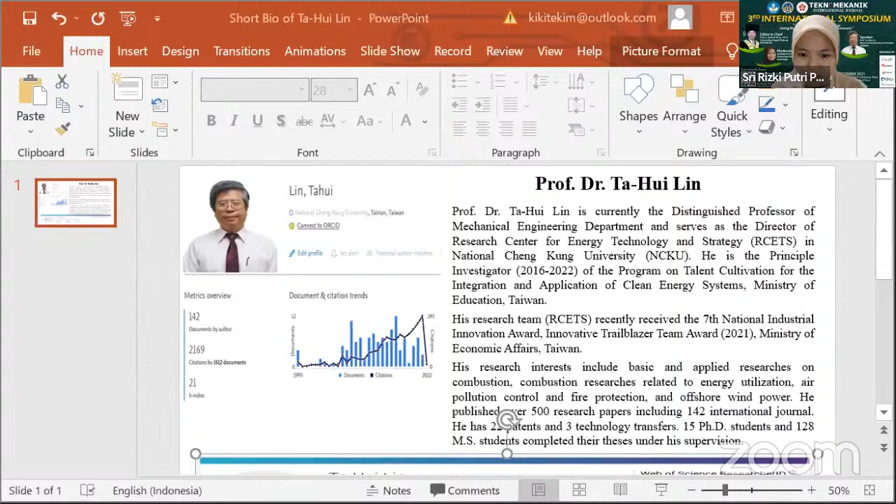The CV of the professor can be seen on my screen. His research team recently received the 7th National Industrial Innovation Award, Innovative Trailblazer Team Award 2021, from the Ministry of Economic Affairs, Taiwan. His research interests include basic and applied research on combustion related to energy utilization, air pollution control, and fire protection, and offshore wind power.

He has published over 500 research papers, including 142 international journal papers indexed in Scopus. He has 22 patents and 3 technology transfers. 15 PhD students and 128 master's students completed their thesis under his supervision.

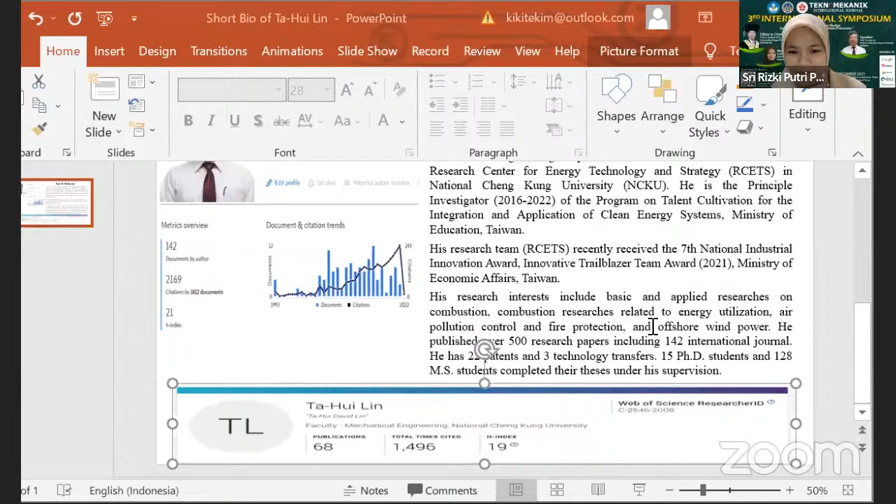Thank you. Let me share my screen. Can you see the slides? Yes, clearly, Professor. Okay, thank you so much.

It is my privilege to have this very nice opportunity to communicate with all of you and present our recent results on biomass studies. Before my talk, I would like to thank Professor Sherry, Editor-in-Chief, for this symposium and journal, and for giving me this opportunity to share our research findings with you. I also thank Kiki for all the arrangement for this presentation.

Now I start to deliver the talk using these slides. My title is Utilization of Sewage Sludge using Multiple Thermal Conversion Processes. Those experimental observations were actually performed by my student, Ernest Forges, and my two colleagues, Dr. Cheng and Dr. Fangxuan Wu. Those results are coming from our research center.

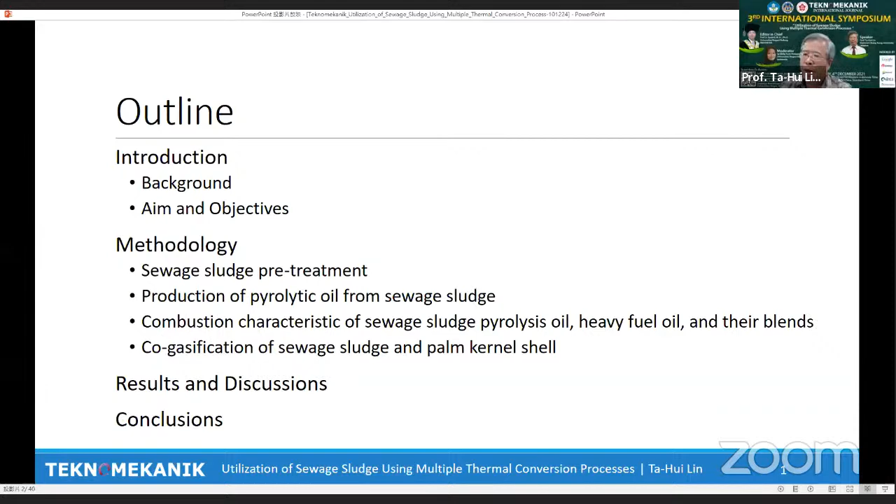In this talk, we will cover, initially, some introduction on the background and objective of this research. We will introduce some methodology for the pretreatment of the sludge, and try to give some understanding on how to produce pyrolytic oil from the sewage sludge. We will check the combustion characteristics of the blended fuel of sewage sludge, pyrolysis oil, and heavy fuel oil. Finally, we will have some introduction on co-gasification from our experimental results. Then there will be results and discussion presented, and finally I will give you the conclusion.

In the introduction section, recently, all over the world, people talk about carbon reduction, especially with the main target for 2050, where people try to eliminate carbon emissions down to 10 gigatons compared with the current 32 gigatons of CO2 carbon dioxide emissions. This is a big target for us. So how do we reduce carbon emissions?

Actually, the utilization of renewable energy will be the big task. People think about the two major renewable energies, wind energy and PV, which will be the most important two renewable energies to achieve carbon dioxide emission reductions. But in the second position, we need to think about bio-waste utilization.

Since bio-waste utilization is spread all over the world in different kinds of situations, here I try to give you an understanding of where we can find bio-waste.

For example, from the forest and wood processing, agriculture, agro-industry, and even in the city, we have so many different kinds of waste and animal waste, and also from food processing and the paper industry. Those different resources will provide different kinds of biomass.

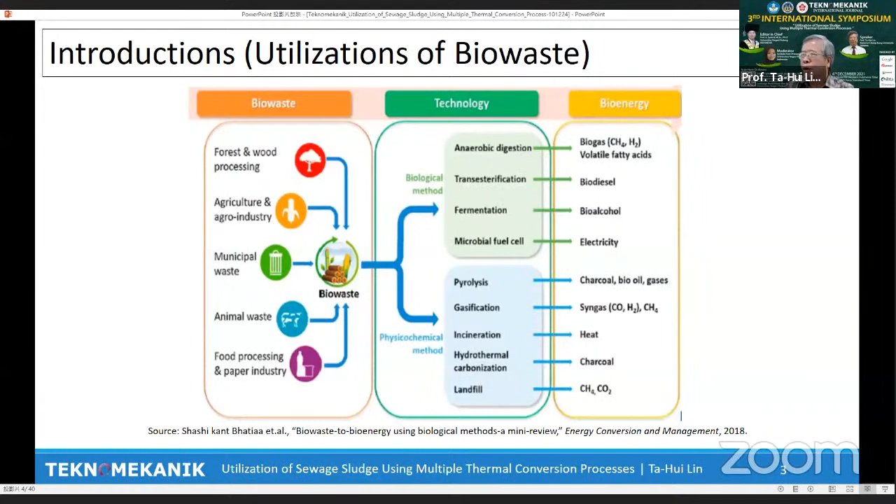This is an overall picture to tell you where you can get bio waste, and how we can convert bio waste to bioenergy through different kinds of technology.

Now we try to focus on the target of our study, so-called sewage sludge. Sewage sludge is usually produced from the water treatment department in different kinds of companies. There is a summary on sludge production for different countries.

You can see from these figures, let's look at the production per year. There is a large amount of sludge production by China and the USA, because they are big countries and have a large population. They have large productions for sewage sludge, reaching 6 million tons per year.

I think Indonesia still has a certain amount, maybe a big amount, of sewage sludge production, but in the literature we cannot find this data. Maybe you can check it. I think there is potential to think about how to use sewage sludge to produce energy.

But in different countries, they try to deal with sewage sludge or other bio waste by different methods. In this plot, you can see they may go through agricultural use, or incineration, or compost, or landfill. Now I'll give you some understanding of different kinds of application.

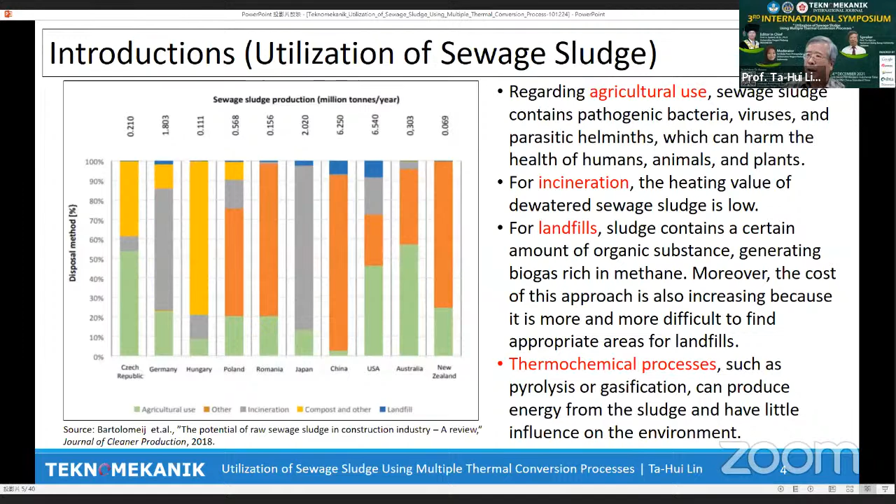Now, based on the physical chemical processes, we look at biomass in thermochemical conversion. There are 2 parameters you need to consider: temperature is one of the controlling parameters, and the other is oxygen supply. Based on the temperature range and oxygen supply, you can get different products, as shown on the left vertical axis. Let's discuss this.

The first case is if you supply enough oxygen and let it go through the combustion process, we call this thermochemical combustion. In this process, the temperature is pretty high, from 900 to 1500 degrees Celsius, and you convert your energy to heat, releasing heat directly. This is the so-called combustion process.

The second case is you reduce the oxygen supply. That means you do not want complete combustion for your gas or sludge, but you try to make it into a gas. The product will be syngas. In this process, the temperature range is between 600 and 1300 degrees.

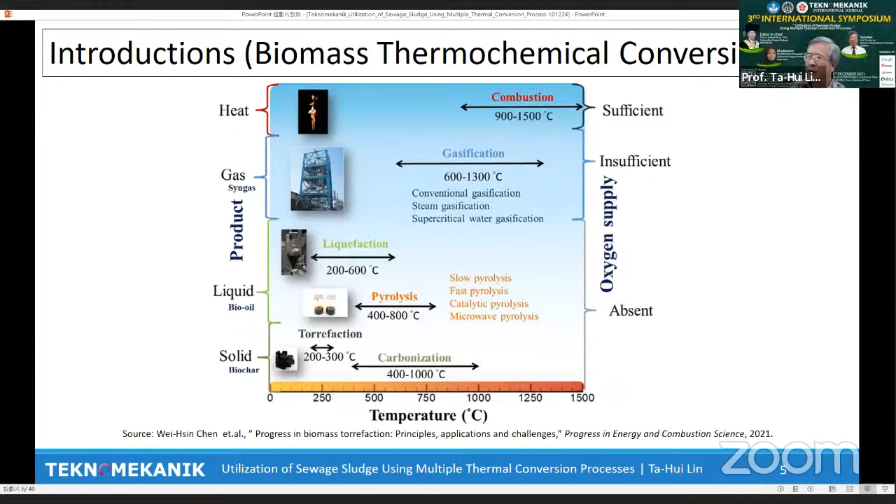Finally, the last one is the solid biochar. In this situation, you do not supply too much energy. The process is controlled at a lower temperature, in the range of 200 to 300 degrees. We call this torrefaction. If you increase the temperature higher, we call this carbonization. For the solid biochar, they just get rid of the liquids and you have a solid product. This is a brief classification for biomass thermochemical conversion.

Now we go to our objectives for this study. In this study, we try to give you some understanding about 2 important processes involving physical chemical processes. The first is we look at the pyrolysis process for the pyrolytic oil.

We produce the sludge pyrolysis oil, which I'll call SPO for short. We try to mix it with heavy fuel oil frequently used in industry, and see their combustion behavior. In the first step, I will tell you how to make the sludge pyrolysis oil. In the second step, I'll deal with the behavior, since this product mixes well with heavy oil, and we want to see if there's any advantage from this kind of co-combustion in the blended fuel.

The third objective is I'll introduce gasification of the sewage sludge. Since sewage sludge usually has relatively low thermal content, you need to mix it with different kinds of biomass. Here we use PKS, palm kernel shell, to mix together, and see the final result for the syngas produced. For the syngas, we will focus more on carbon monoxide and hydrogen for further use. So there are 3 objectives, and I will introduce each one briefly.

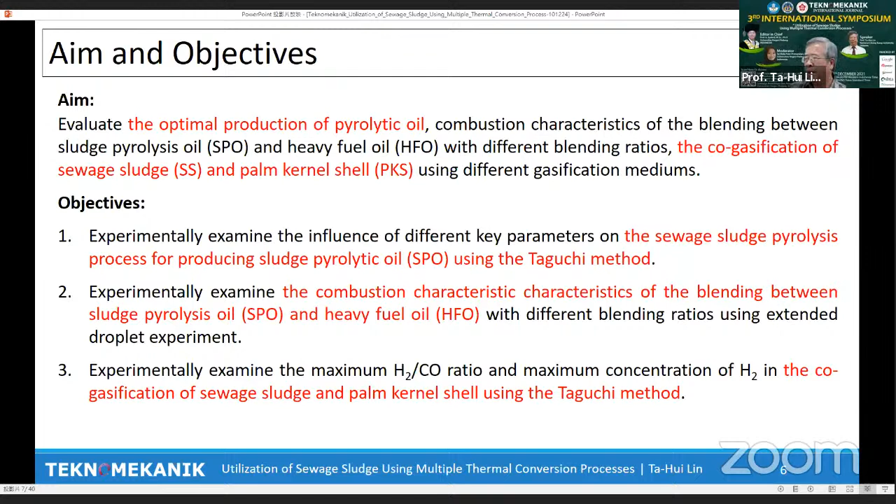Now, in the studies, we use different kinds of methodology and also equipment. I will just introduce very briefly for you. The first one, we need to deal with the sludge pretreatment.

This figure A is an original picture of the sewage sludge taken from a wastewater treatment plant in Taiwan, supplied to us by the Tainan city government. Before we go through gasification or pyrolysis, we need to get rid of the water from the sludge, because the original sludge from the plant always has a water content higher than 30%. Those moisture levels need to be heated up to reduce the water content. This is the first step you need to prepare.

How to do it? We preheat the sludge to 110 Celsius, and then the moisture will reduce below 10% of the total weight. Later on in our presentation, you will find all the sludge samples usually have a water content less than 10% of the total weight.

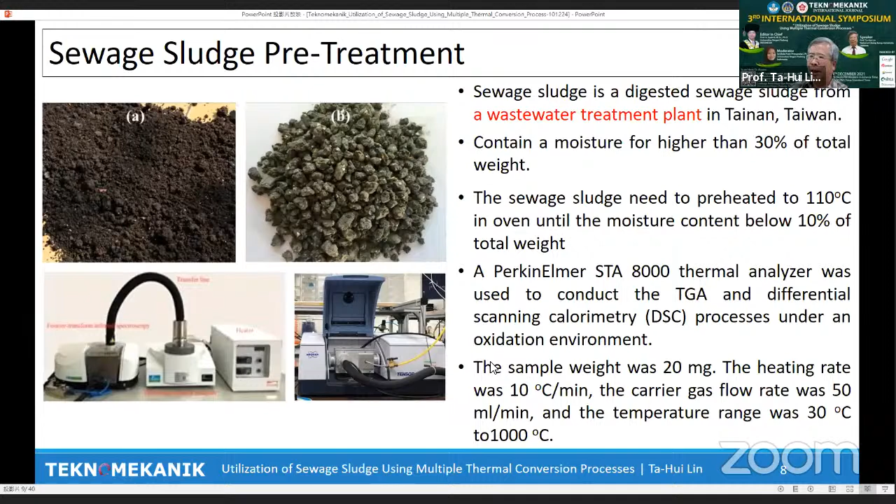In the earlier stage, step 1, the furnace should be heated from room temperature to the pyrolytic temperature. Later, in step 2, the pyrolysis process will occur. Then your pyrolytic temperature will stay constant continuously until the end. If you count the time starting from reaching the fixed pyrolytic temperature until the end of the process, we call this the residence time.

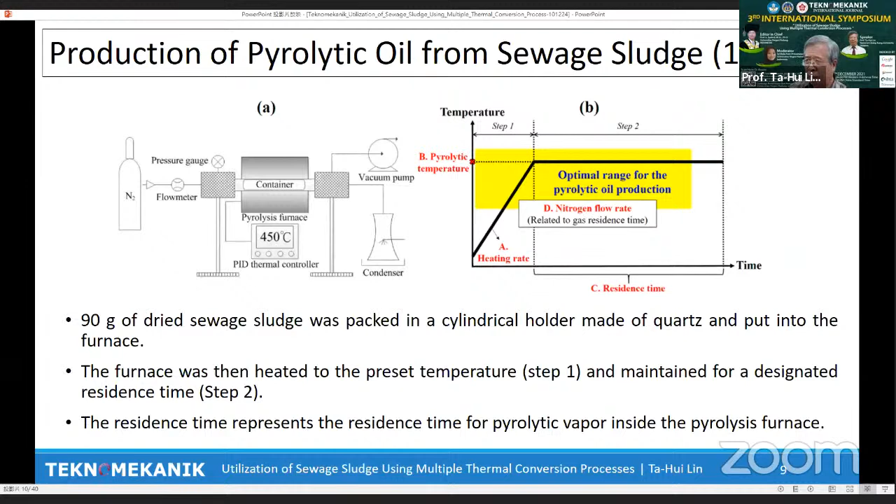Here, A is the heating rate. If you increase the heating rate, the time for step 1 becomes shorter. If you produce a lower heating rate, the time required for step 1 will be longer. B is another parameter, the pyrolytic temperature, which is very important. Residence time is another one. Finally, nitrogen flow rate will be considered. That means we have 4 control parameters, and you need to examine those effects.

From the experiment, since you have 4 parameters and you try to vary the quantity of these 4 parameters, it makes the whole experiment very complicated. Now, people usually use for those kinds of experiments a very famous so-called Taguchi method.

The Taguchi method uses the idea of the so-called signal to noise ratio to identify the quality characteristic deviating from the desired value. That means if you have a target value and you change your parameters based on variations of that change, you can identify which parameter's weighting can be justified, and you will find the optimal situation for different parameters.

For this experiment, we designed 16 experimental sets based on 4 controlling parameters. Later on, I will give you the list of the quantity of each parameter. For each set of experiments, we usually repeat 3 times and take the average value to make sure all the quantities, all the physical properties, are under control.

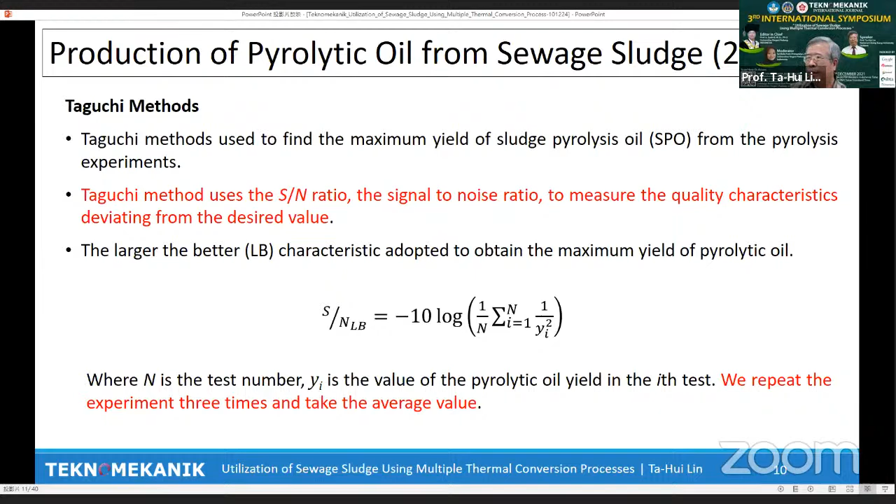The next one, we will study the combustion characteristics of the oil we produced, mixed with the heavy fuel oil, using the single droplet burning apparatus.

We try to test different kinds of blended fuel. The blending ratio ranges from pure heavy fuel oil, to 20% sludge oil, up to pure sludge oil. We try to think about the influence of the blending ratio and the participation of the sludge oil — how it's advantageous for this kind of mixed burning.

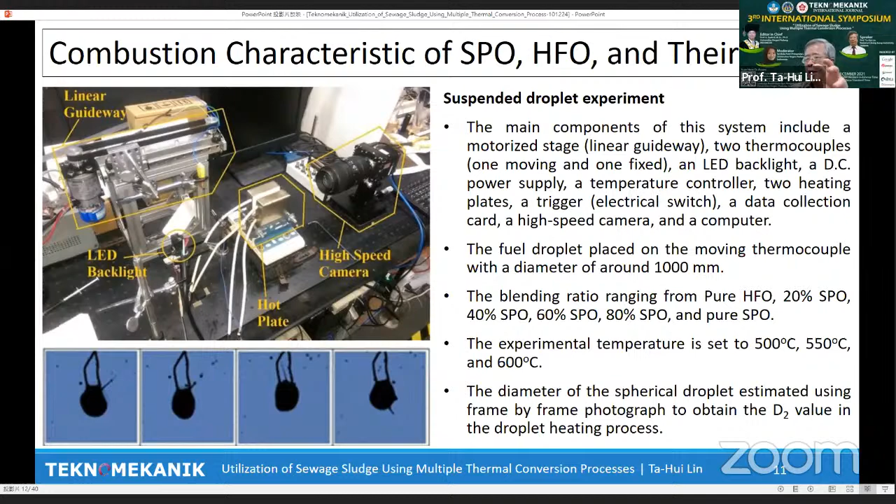There are the 2 heating plates, and we use the thermocouple with a suspended droplet to move it into the center of the region, and we start taking continuous pictures using the high-speed camera to see the variation of the droplet until the burning occurs. These are blended droplets.

Fluidized bed means that on the bottom of the furnace there are bed materials. We use quartz sand as the bed material, with size ranging from 250 to 300 millimeters. We also add a certain catalyst — we use olivine as a catalyst, ranging from 0 to 25%. This catalyst plays a very important role in the gasification.

From the bottom we supply the carrier gas — those kinds of gasifying agents, including carbon dioxide. We can supply carbon dioxide, add a certain amount of nitrogen, accompanied with steam. Usually for the gasification process, the amount of steam plays a certain important role, and that water will get involved in the gasification process.

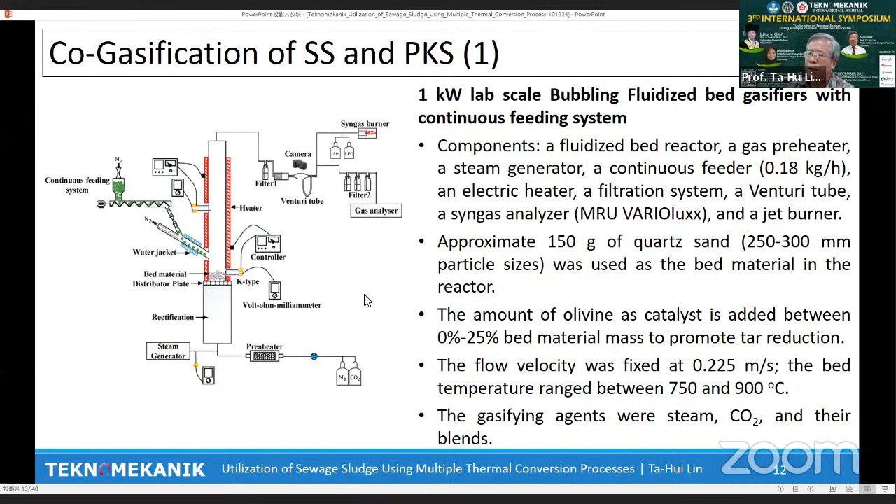Later on we do the measurement with the gas analyzers. Finally, the gas will go through the burner and burn out. In this process you can do the measurement for the final composition of the syngas you produce.

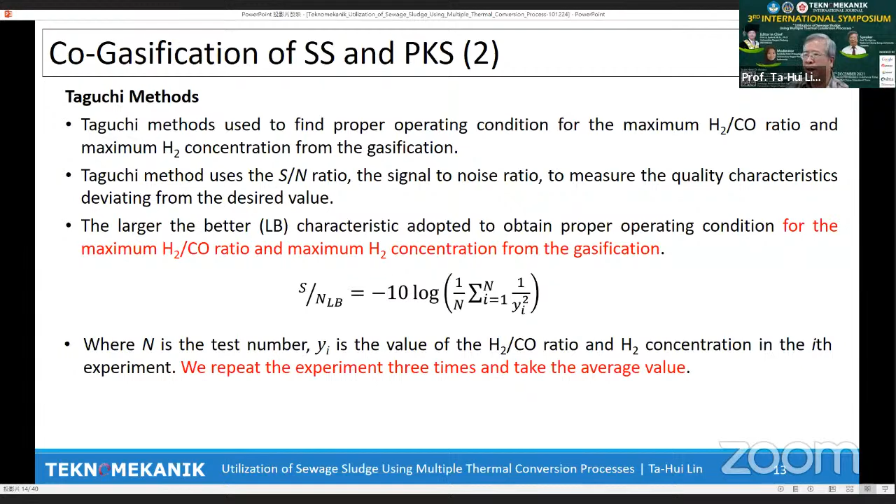For this experiment, similarly, we use Taguchi methods to identify the optimal parameters for generating syngas through the sludge and PKS. Now I've finished the introduction on our apparatus and methodology.

Then I'll try to give you some understanding of the results. First, we need to think about the properties of sludge. Usually sludge is a so-called multi-component material, meaning it has different kinds of components mixed together.

Those components have different boiling points for gasification. For example, sludge has a certain amount of water. When you put a sample of sludge into the furnace, or into the oven for thermal analysis, you will see the moisture evaporate first. Then the lower boiling point materials will gasify later — by this process, the lower boiling point components go out first, and the weight of your sample will continuously reduce.

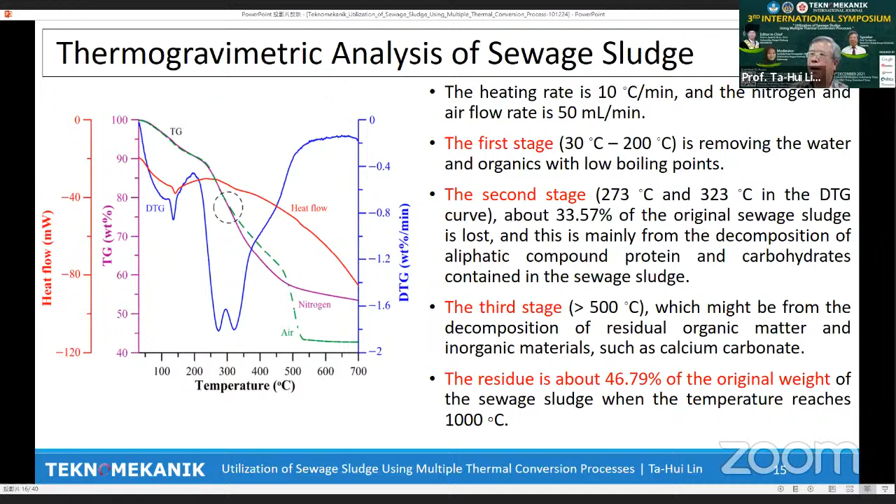For example, for the heating rate, we choose 10 Celsius per minute, 20, 30, and 40 as 4 different levels. For the pyrolysis temperature, we vary from 450 to 600 by changing in steps of 50.

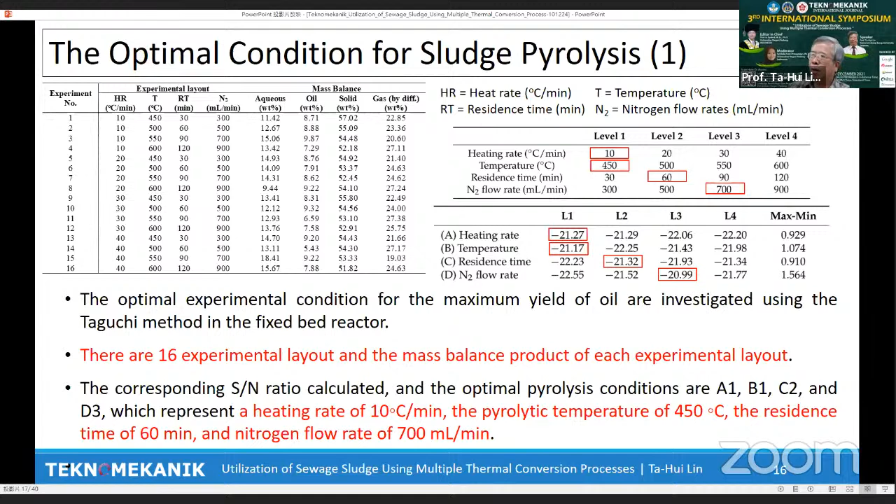But we need to double check, so we try to calculate the theoretical maximum pyrolytic oil, and we find that the product will be 0.1044 gram per 1 gram sample. We try to compare with our identification, and the experiment result is 0.1019. They are very close, right?

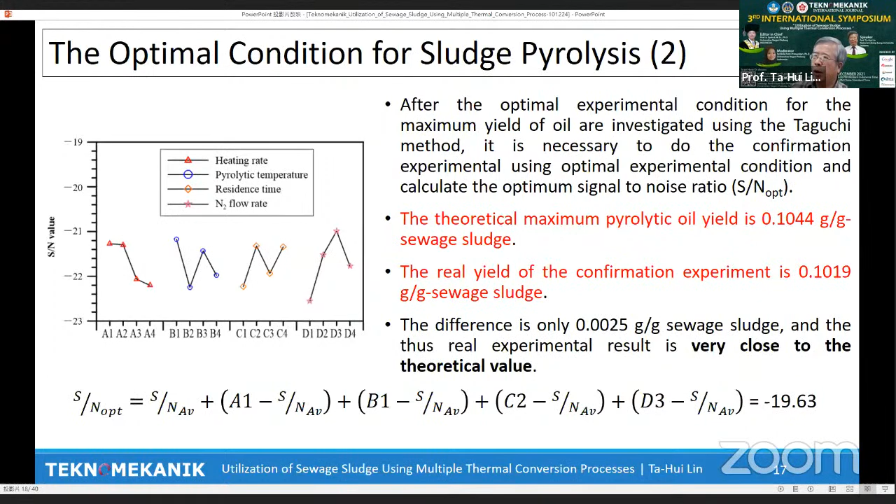Now, when you have pyrolysis oil, you need to bring that oil to mix with heavy oil and do the combustion to see the results.

Since we already finished the pyrolysis process, we still need to justify the composition of the products of the pyrolytic oil. So we bring our oil to the thermal analyzer to do the TG analysis again. There are 3 stages.

The first stage is the so-called dewaterization stage. Stage 2 is the decomposition of volatile matter with a lower boiling point. The final stage is basically the primary combustion stage. This can be clearly identified based on the very significant variation in the weight percent slope.

One thing I need to mention: the final residue that cannot be burned is around 11.90% weight remaining when you heat through 1000 degrees Celsius. This is the analysis of the variation in composition of your SPO, the sludge oil.

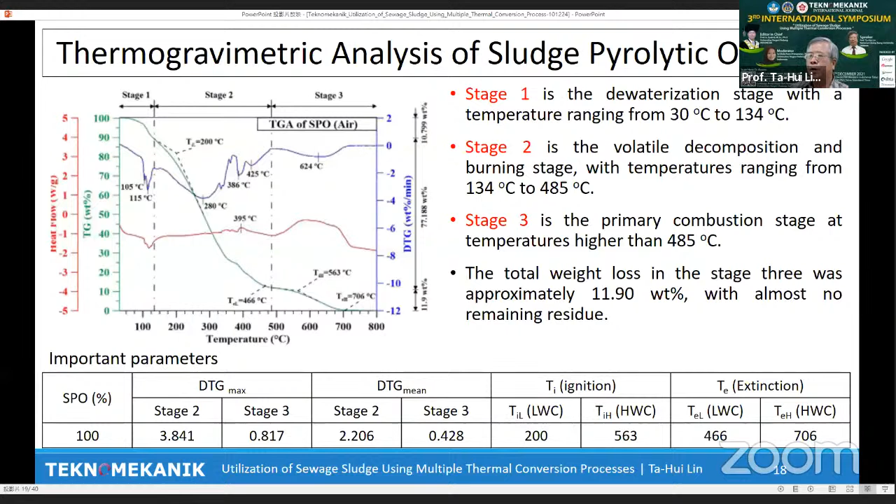Because we mix the sludge oil with heavy fuel oil for the burning, we need to do the TG analysis on heavy fuel oil as well, and this is the heavy fuel oil result.

The most important difference for these two fuels is that for the heavy fuel oil, stage 1 disappears. Simply put, the evaporation of water, called dewaterization, is very short - you cannot figure it out from the analysis. Usually for heavy fuel oil from the oil company, they already get rid of all the water, so you do not have a stage 1 for heavy fuel oil. This is completely different compared with the previous stage 1 for the pyrolysis oil.

Later on you still have a stage 2 for the decomposition of the volatile material and the burning. Finally, stage 3 gives you the primary combustion stage. The residue for heavy oil has a lower percentage of weight, 10.21, compared with that for the sludge oil. Now you understand the composition for the sludge oil and the heavy oil.

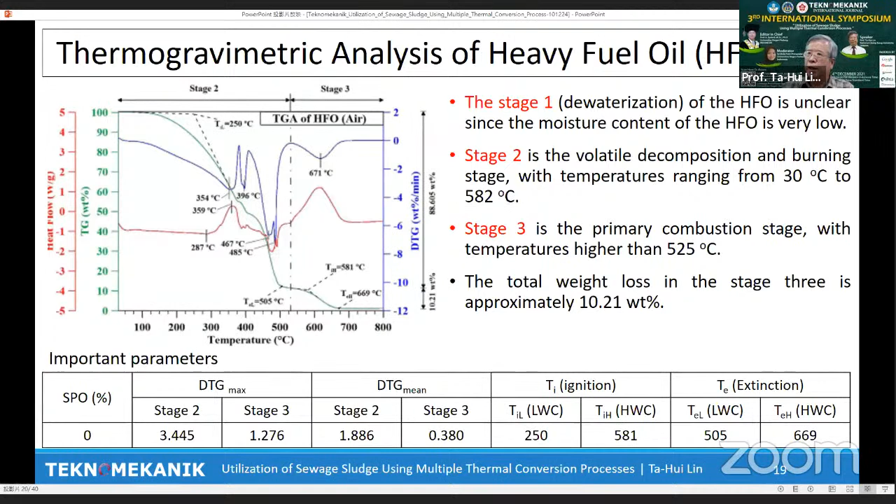Then we bring them together to see how they vary. We did different blending ratios from 20% up to 100%, and did the TG analysis. I will not repeat this again, but I'll give you the overall results and conclusion of this test.

We find that in the dewaterization stage, it increases with the increase in SPO content. That means if you have more pyrolysis oil, this stage becomes significant and the weight loss becomes larger. This is understandable, because when you have more sludge oil, you have more water content, and the weight loss will become larger.

This typical weight loss is influenced by the water content in the sludge oil. Second, if you have a higher sludge oil content, you will have more significant weight loss in the earlier volatile decomposition and burning stage.

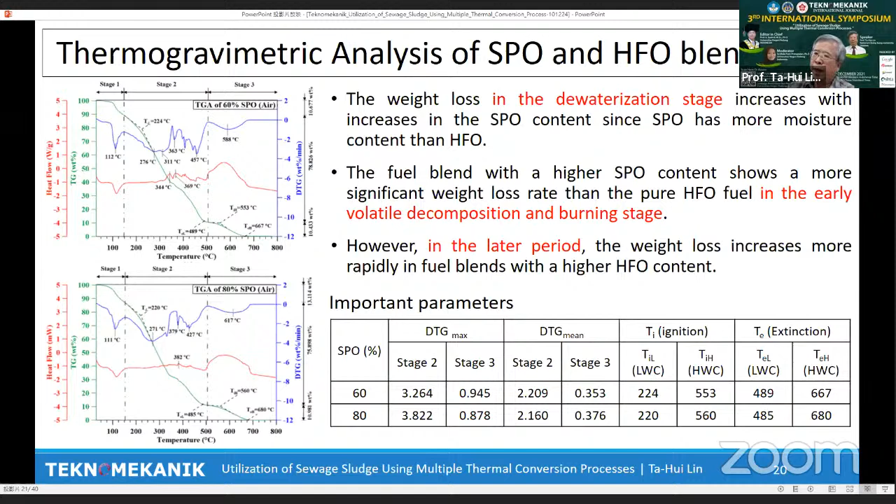The detailed analysis will follow by checking the combustion parameters. I'll give you a quick observation on the results. There are two indices here: one is the flammability index, the other is the combustion index. We use the data from the TG analysis to calculate these.

Simply put, if you have a larger C index or larger S index in the combustion process, that tells you the combustion becomes stronger. Now, as I mentioned, the interesting thing is about these blending fuels.

When you look at blending fuel of sludge oil with heavy fuel oil, in the gasification process, the initial stage is controlled by the sludge oil, and the later stage is controlled by the heavy oil. Now you can see here the index: L means the low weight component, representing the initial period, and H represents the high weight component, meaning materials with higher boiling points.

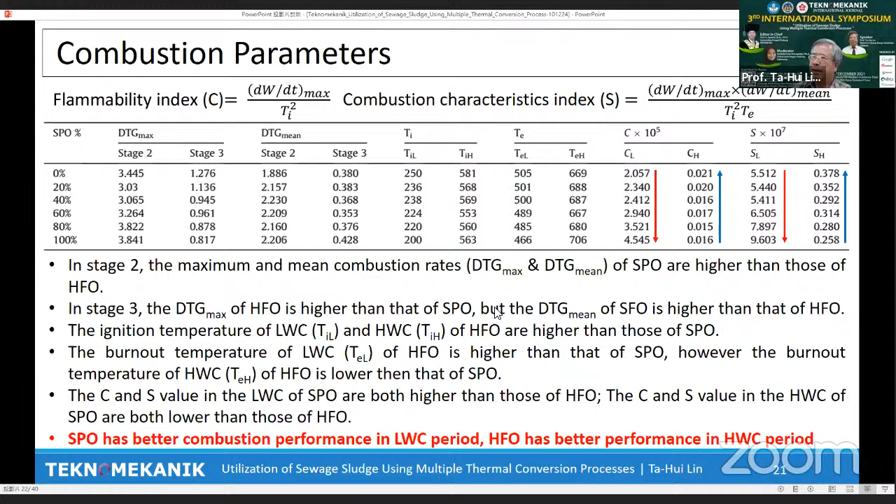This is a typical evaluation of combustion characteristics. Finally, we can state: the SPO, sludge oil, has better combustion performance in the lower weight component period. However, the heavy fuel oil has better performance in the higher weight component period. This is a very important conclusion for the mixing fuel.

Later we did experiments for the burning of droplets. This kind of behavior occurs because, as I mentioned, fuels made from sludge always have multiple components—meaning different materials inside the liquid fuel with different boiling points. This is a typical observation on multi-component droplets.

For example, if you have a multi-component droplet, that means on the surface you may have a lower boiling point material mixed with higher boiling point materials. When this droplet experiences high temperature from the surrounding, the lower boiling point material will gasify first, very soon. But later on, the surface will become accumulated with the higher boiling point material. Since the higher boiling point material needs to wait to reach its boiling point for gasification, there's a small period of heating.

But during this small period of heating, heat still continues to transfer into the interior of the droplet. The interior of the droplet still contains low boiling point materials, which will gasify inside the droplet and become vapor. But the whole droplet is liquid, so this vapor gets trapped in a small control volume, which means pressure builds up. Once that pressure reaches a certain value, it will break the droplet into tiny droplets, or sometimes the vapor will be injected out. We call this a micro explosion.

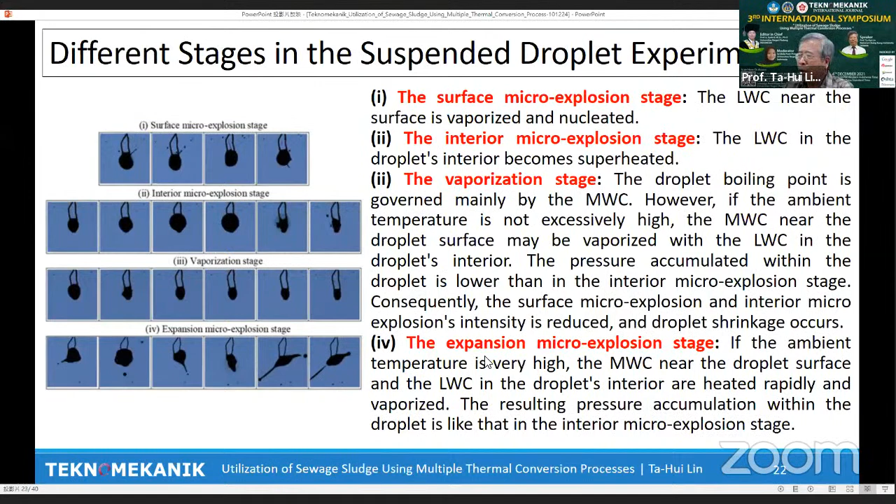Now the fourth stage: there's still expansion and micro explosion happening. Sometimes you may have fuel vapor coming out, and since we did this experiment in an air environment with the heating plate providing high enough temperature for ignition, sometimes this produces a flame. These flames occur in the gas phase, burning out the fuel vapor that comes out.

When you burn out all the fuel vapor, finally you just have a tiny droplet left, with a very weak combustion process persisting on the surface. We call this the smoldering stage. Finally, the whole combustion process in the gas phase and on the surface completes, and you're just left with a residue.

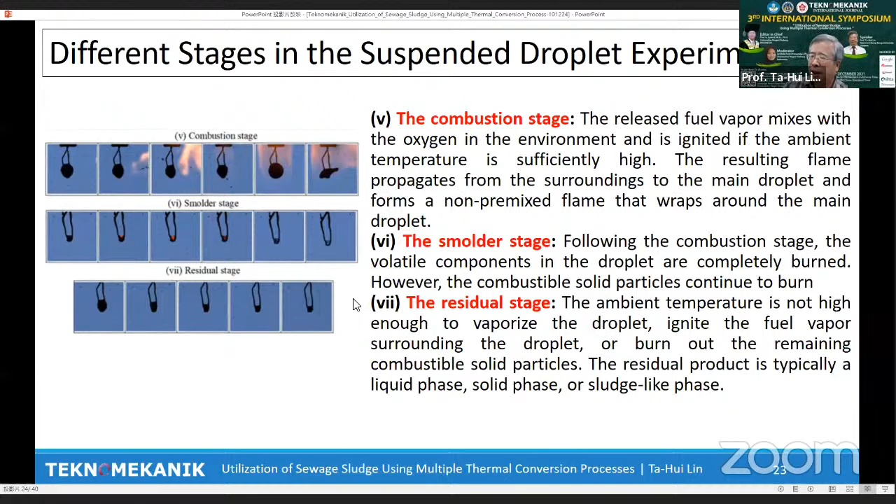This is the behavior you can observe in the whole combustion process for a given mixed fuel of pyrolysis oil and heavy fuel oil. From long-term observation, I'll just give you the overall conclusions.

From our observation, you can measure the droplet size, and the big fluctuations in the figure tell you the droplet size is always changing because liquid and vapor are injected out, so the size sometimes expands and sometimes ejects out and becomes smaller. We find that higher sludge oil content increases the frequency of micro explosion, because the lower boiling point pyrolysis oil is easier to gasify inside a droplet, which promotes micro explosion.

The residue products of fuel blends with lower pyrolysis oil content range from 0.63 to 0.85 times the original diameter - this is the residue compared with the original droplet diameter. But for higher SPO content, the residue becomes smaller compared to the previous case. As I mentioned, if you do not have too much pyrolysis oil, you will have larger residues.

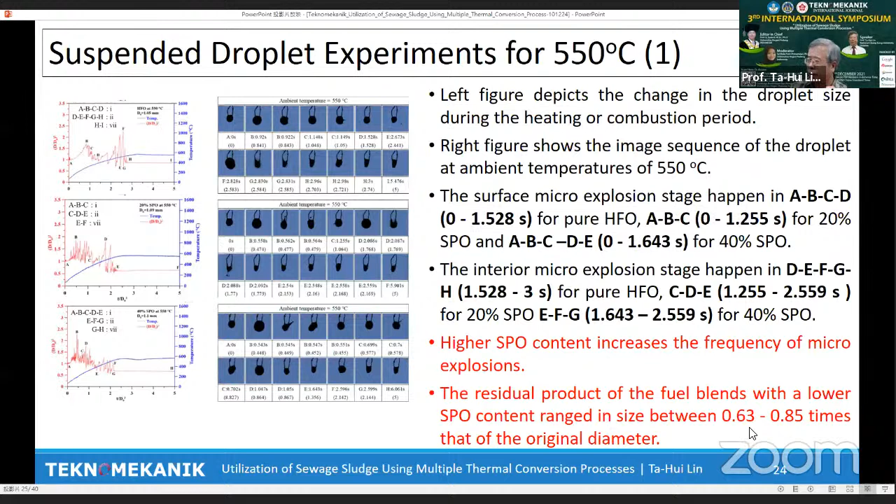Here they tell you if you do not have too much SPO, the size of your residue is very close to the original one. But if you increase the SPO contents, they will reduce maybe just 20% the size of original diameter. This tells you the application of pyrolysis oil has some improvement on the burning of your droplets.

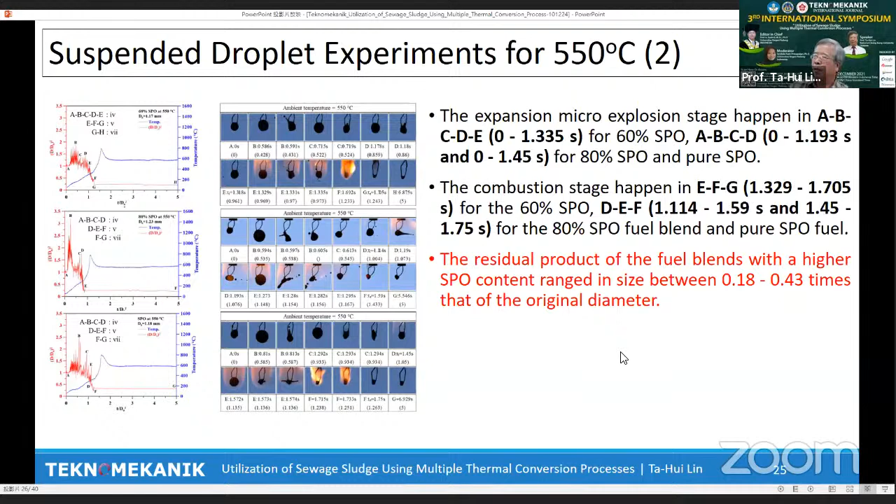We try to do the so-called D-square law of variation, because from the theory for droplet gasification, if you count the droplet diameter square, it means you count the surface area of your droplet. You'll find the variation of your droplet surface is linearly decreased in the combustion process.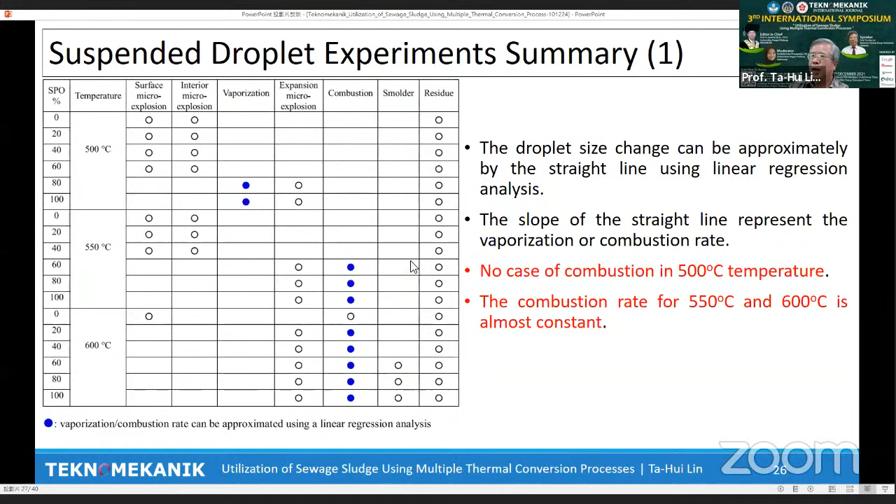We get these results and it's very nice to show you here. If you measure the droplet diameter, non-dimensionalized by the initial droplet diameter, and try to put your data along with the time scale, this is a non-dimensional time, meaning that when you ignite it and then measure the droplet diameter.

Make it a square, and you can see the variation, especially when you have a steady burning process, you can see this is a linear line, exactly as predicted by the D-square law. This is also a linear line for different blending ratios of your droplet.

The green color represents 100% pyrolysis oil, and 60% means you have a lower percentage of your pyrolysis oil. The rest of it will be the 40% heavy fuel oil.

How do we look at the burning intensity of the blended fuel? People need to check the slope. If you have this linear line, you can calculate the slope, which we call the evaporation constant. If you have a larger evaporation constant, the burning intensity or evaporation intensity is stronger. If you have a small one, the burning intensity or evaporation intensity is smaller.

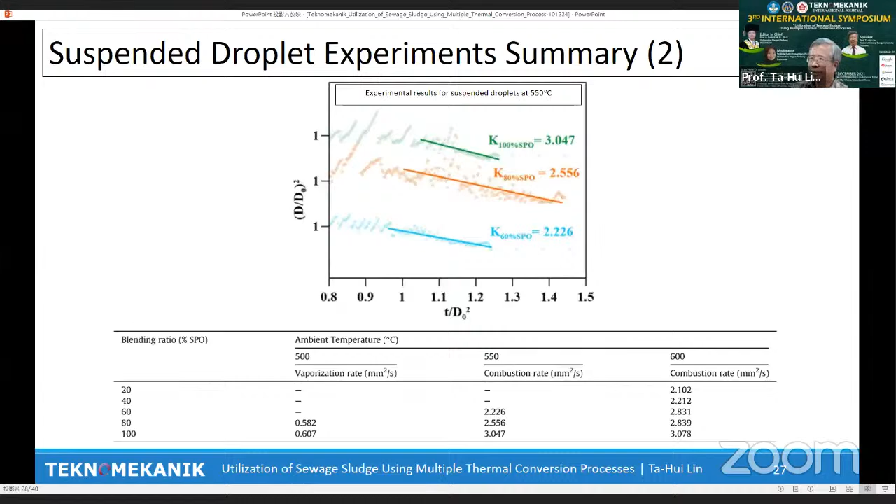Now we go to the final section for gasification. Since those materials taken from the company for the sludge always have composition changes, everybody should remember when you repeat or initiate another project, you need to repeat the thermogravimetric analysis again. This is for gasification, because we try to bring those waste materials together: one is the sludge, the other is the PKS.

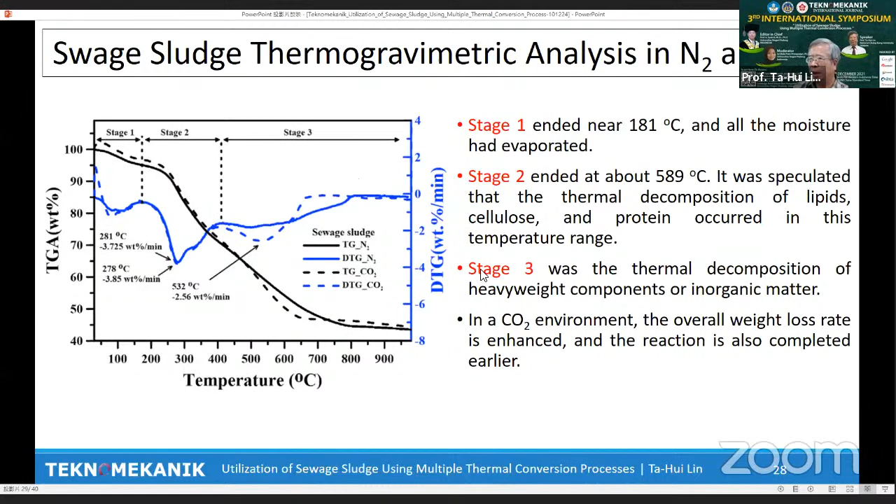We need to do the individual TG analysis. Then we repeat again for a new sample, and you can still see they can be divided into 3 stages. I don't want to explain again.

And for the PKS, now you'll find there's something different compared with the previous one. Here there are 4 stages based on the variation of the slope of your weight loss. Stage 1 tells you there is moisture coming out, similar to the case for the sludge. Stage 2 and stage 3 are basically described as pyrolysis, having hemicellulose and cellulose.

Actually, the compositions for sludge and PKS are completely different. They may have different gasification periods. Therefore, for the PKS, they have an additional stage 4. By this slope change, you can identify the different stages. And the final stage is very similar.

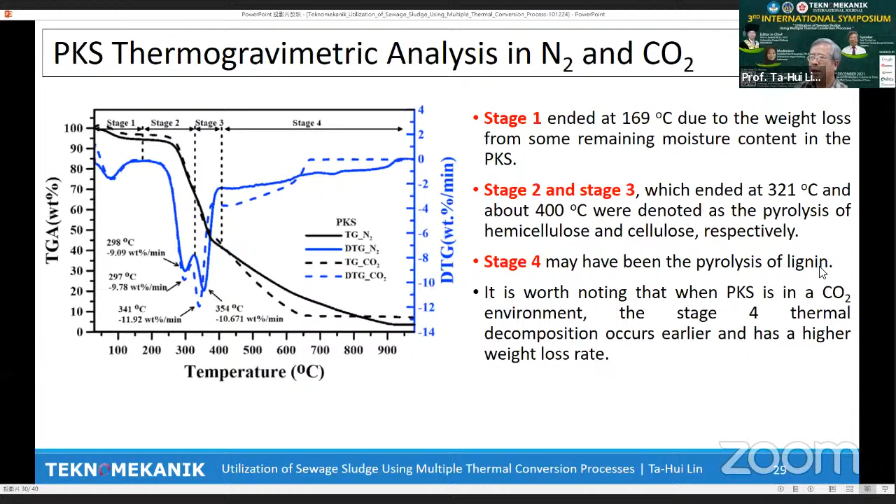Here there is the pyrolysis lignin. Now we try to bring these two materials together for gasification and think about optimizing our controlling parameters.

As we described previously for the pyrolysis, we still do a similar arrangement. We have 16 experiment sets, and here there are 4 control parameters. One is the gasification temperature, this is T, and the fuel blending ratio, because we mix the sludge and the PKS, the blend ratio is one important parameter. And the third one is very important.

You remember, for gasification, we need to have some gasifying fluid, basically composed of carbon dioxide and also steam, that means water. This is a key factor for gasification, and we need to make it an important control parameter.

CO2, the carbon dioxide, divided by the total carbon dioxide plus steam. This is the important parameter you need to identify. The final one is how much you use the catalyst. Okay, I give you some explanation.

For example, for the gasification temperature, we choose 4 temperatures: 750, 800, 850, and 900. For the percentage of the carry gas CO2, we choose 55%, 70%, 85%, and 100%.

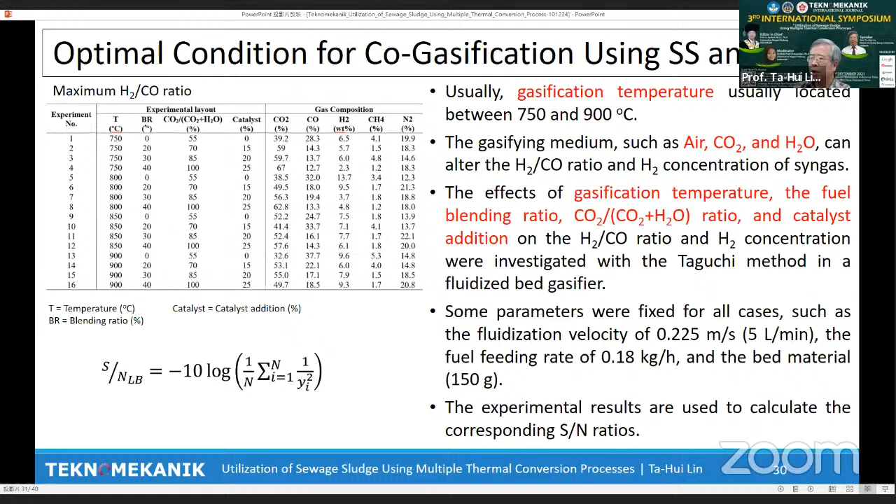Okay, and we still follow the same procedure to calculate the corresponding signal to noise ratio to identify the control parameter. Okay, I just give you the simple results. For the gasification process, you will produce a syngas.

The component for your syngas, basically, people will consider the availability of your syngas for future utilization. They will consider 2 factors. The first one, how much hydrogen you have. The other one is the hydrogen and carbon monoxide ratio.

Basically, the composition for the syngas usually has carbon monoxide, hydrogen, and sometimes a small amount of methane, but mainly the major components are hydrogen and carbon monoxide. Hydrogen usually has a lower thermal content, heat of combustion. Carbon monoxide has a higher one. Therefore, the ratio between hydrogen and carbon monoxide is an important parameter you need to identify. Therefore, we use these 2 factors to justify the control parameter from our gasification process.

Similarly, if you look at the ratio between the hydrogen and carbon monoxide productions, by those kinds of parameter variation, you will find out for parameter A, the lowest one is level 4, for B, the lowest one is level 3, and for C it's level 2.

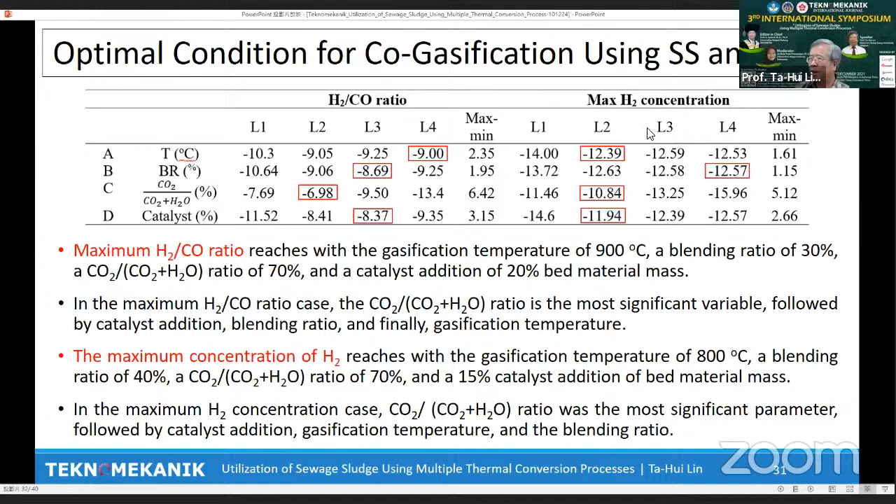When you have those kinds of determination on the optimal control parameter for hydrogen carbon monoxide ratio and also for maximal hydrogen concentration, then you need to confirm it again with theory. Okay, and this is the result.

You can see for the maximal hydrogen carbon monoxide ratio, theory gives you 57.4. In our experiment, we have 56.3, very close. That means our identification of the optimal control parameter is very nice.

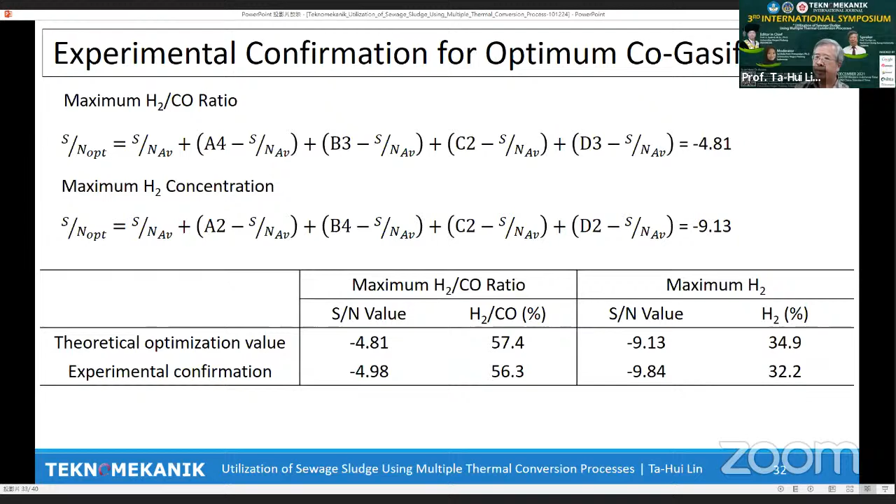This tells you we try to identify the control parameter for the gasification process by using the signal to noise ratio method. The result is pretty much good. Now we reach the conclusions here.

Based on our three big objectives, I give you a very short summary. For the first one, we are dealing with the production of pyrolysis oil, right? And here, actually, we identify there are 4 major parameters you need to consider.

One is nitrogen flow rate. The other one is pyrolytic temperature. The third one is heating rate. The final one is residence time.

From our experiment, by using the Taguchi method, we identify the value of the quantity for each parameter shown here: a heating rate of 10 degrees Celsius per minute, a pyrolysis temperature of 450 Celsius, residence time is 60 minutes, nitrogen flow rate is around 700 milliliter per minute.

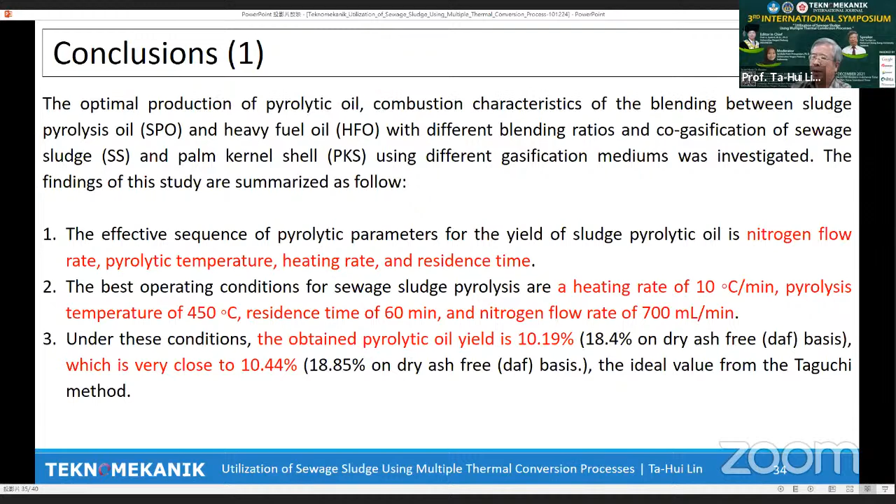And we confirm with the theory, and they show very good match, which means in this experiment we already successfully identified the suitable optimal control parameters for our pyrolysis process.

Next, we try to examine the combustion behavior of the blending fuel of the sludge and the heavy fuel oil. I won't repeat those detailed processes, as those stages may change for different blending ratios. But in general, the pyrolyzed oil contains a great amount of water and lower weight components compared with the heavy fuel oil, and a higher pyrolysis oil content in the fuel blend will increase the frequency of micro explosion events because they have more lower boiling point components, easier to be gasified and produce micro explosions.

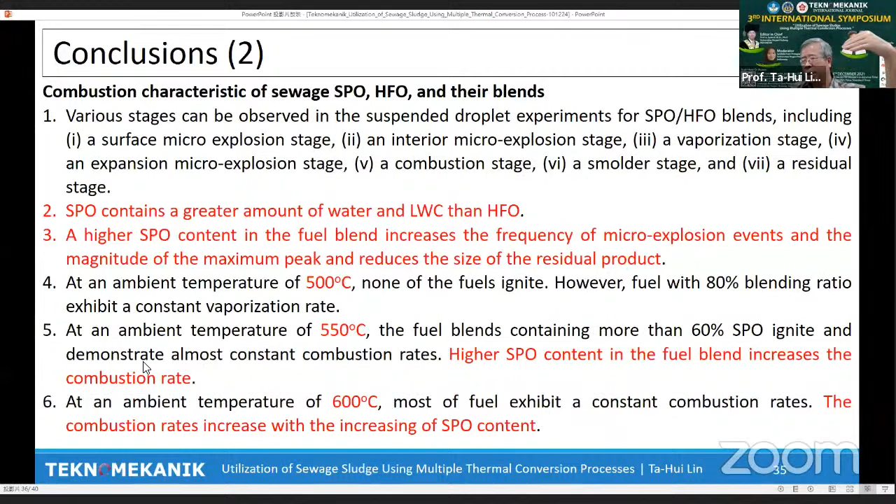Under the heating conditions of 500, 550, and 600 degrees, at 500 degrees Celsius there is no ignition of the droplet, no combustion occurs. But for 550 and 600, for these two cases, you can have burning occur. In general, the higher pyrolysis oil content in the fuel blend will increase the combustion rate, as we see through the D-square law analysis with identification on the slope of the linear curve.

The last conclusion focuses on co-gasification. We identify the optimal control parameters for maximal hydrogen to carbon monoxide ratio in syngas, and also the maximal concentration of hydrogen in syngas. Comparing the controlling parameters for these two targets, you find the carbon dioxide ratio for the gasified media is the most important one, because it's important in both target ratios. The second dominant effect is the catalyst addition. In our experiment, we found the amount of catalyst is better controlled within 15 to 20%. Catalysts always play a very important role in the gasification process, and this is an important finding from our experiment.

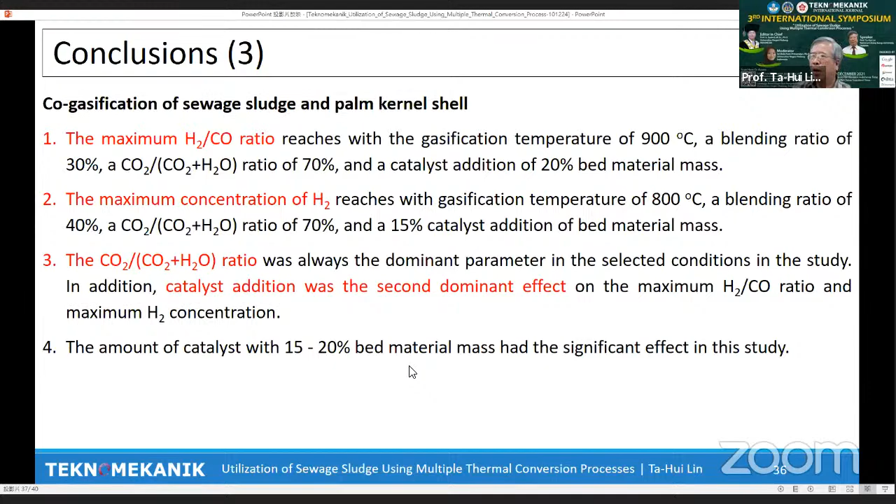I think I finished the summary of our research, and I've given you some references for your double checking. Finally, I think later on we will give you the complete manuscript for detailed discussions on each subject I presented here. I'm sorry because the speaking time was short, I cannot spend too much time on the detailed discussion for each individual step.

But anyway, for this paper, I try to bring your attention to the application of these kinds of bio-waste to different kinds of applications, especially for the industry side, trying to provide more energy to be used, especially technologies corresponding to so-called renewable energy. In the process of achieving zero carbon emission by 2050, this is a difficult target for all of us, and we need additional energy coming from renewable resources. It's good to think about how to pump it and use it to produce syngas or syn-oil and use it very efficiently. I think this is a major goal.

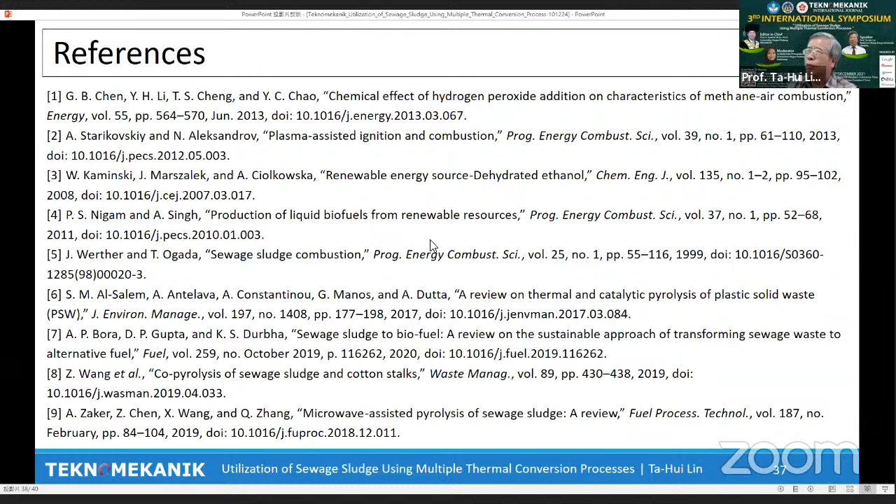Before we continue to the question and answer session, Professor, may I know what is your source of the sewage sludge, from domestic or from industrial sources? Yeah, from the water treatment department.

Usually for the city, as I mentioned, for that kind of sludge sampling we need to have a constant source, otherwise the composition always changes. We have good communication with the Tainan city, and they have different industry sites. For the industry side, they usually have some wastewater treatment, and in that water treatment process they always produce sludge, and we ask that they provide those materials or raw materials for us.

So it's from the wastewater treatment in the domestic sector? Yes, in the city. Okay, thank you very much for the information.

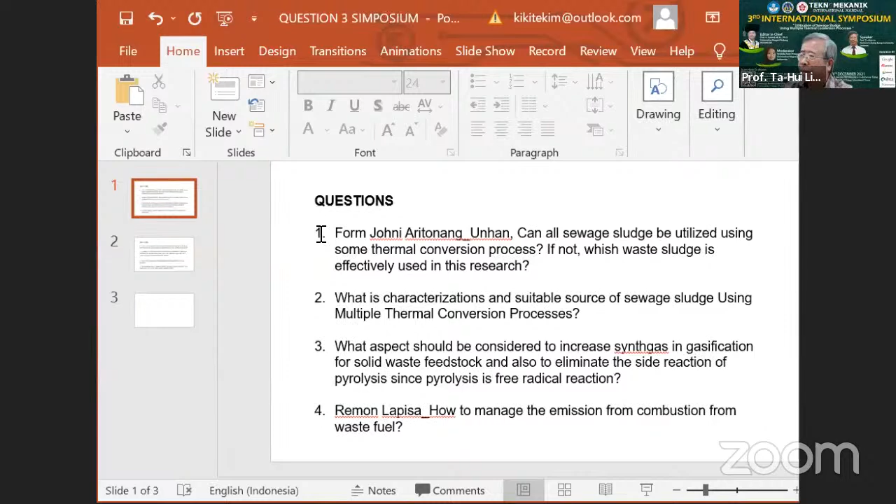First question from Johni Aritonang from Unhan: Can all sewage sludge be utilized using some thermal conversion process? If not, which waste sludge is effectively used in this research? The second question is quite similar: what is the characterization and suitable source of sewage sludge using multiple thermal conversion processes? Do you want to answer one by one, Professor?

I can answer question 1 and question 2 together because this is very important. When you go through pyrolysis or gasification processes, you need to fully understand the property of your sludge. You may ask where can I get the sludge? The source is very important because for many different industry sites, they will get involved with different kinds of productions, and the materials involved become more complicated.

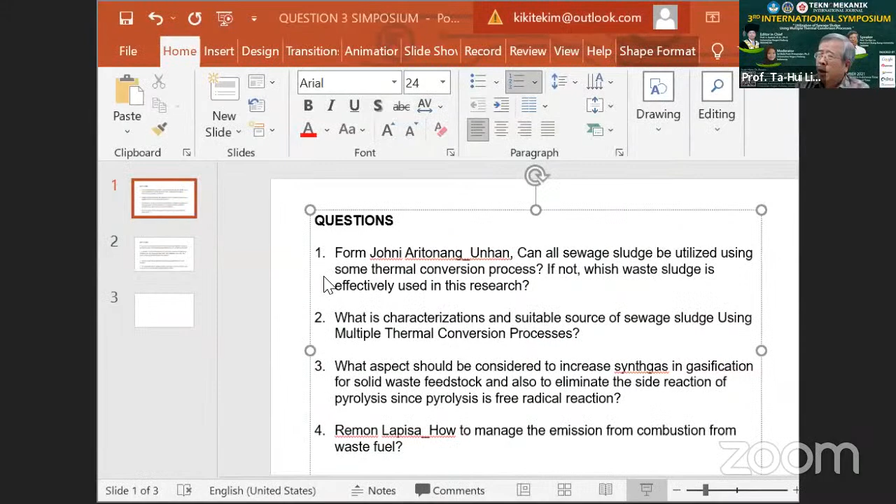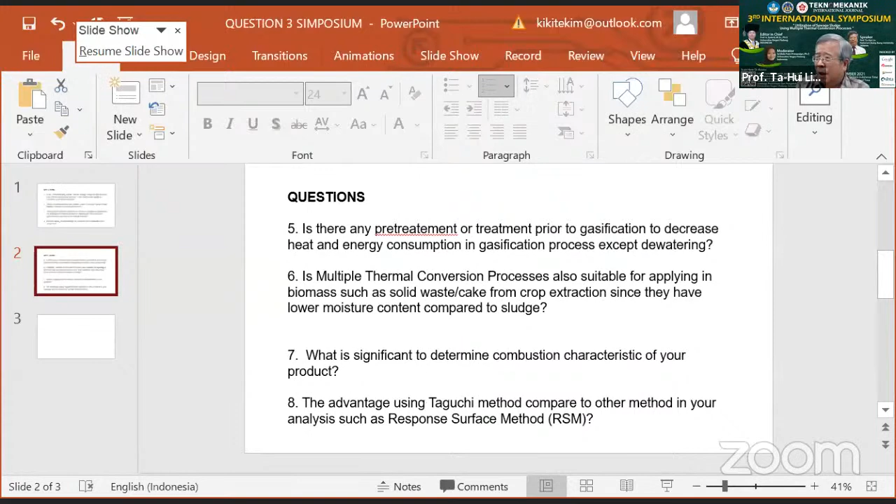For example, wastewater coming from different companies will involve different kinds of components. When you get sludge, you make a pretreatment, dry it, but you need to check the property. So first, for the physical chemical process, you need to check the weight loss through thermal analysis. But you still need additional work on the chemical composition, because some sludge coming from chemical companies will involve different hazard materials.

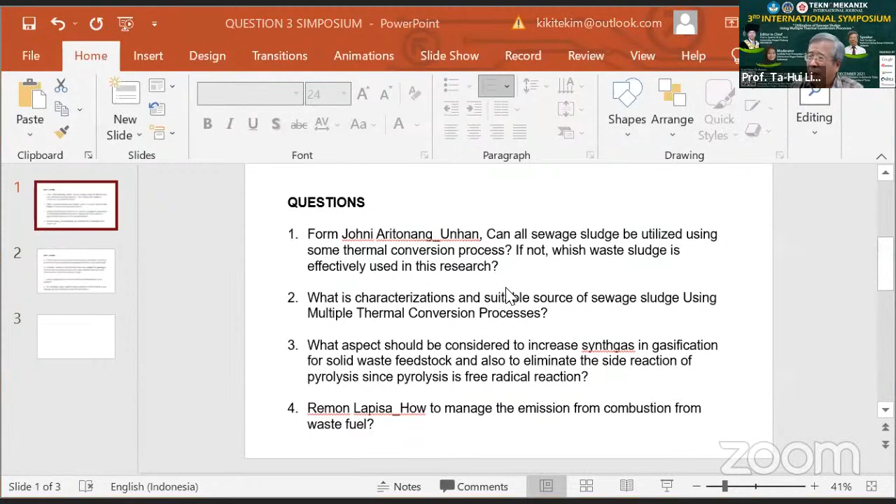You need to address this, otherwise you cannot produce syngas or biofuel, because hazard materials will produce other pollutions. When you look at the application or utilization of sludge, you need a certain examination of the species you may have inside your sludge. For our experiment, we took the sample from the waste treatment department in Tainan City, and we know the composition does not have hazard species, so you can safely make it go through the physical chemical process and produce sludge oil. This is important because you need to check the materials you have, the starch component.

Question 3: What aspects should be considered to increase syngas in gasification for solid waste feedstock, maybe some kind of sludge or cake from biomass? And also, how to eliminate the side reaction of pyrolysis, since pyrolysis is a free radical reaction, Professor?

Yes, this is a good question. From my presentation we talked about gasification, and I tried to give you understanding of the 4 parameters that control the quality of your syngas, and why these are very important. I mentioned the carrier gas, the CO2%, and steam, because they participate in the gasification process. Those 4 parameters are temperature, residence time, carbon dioxide ratio, and catalyst. You can find this from the literature.

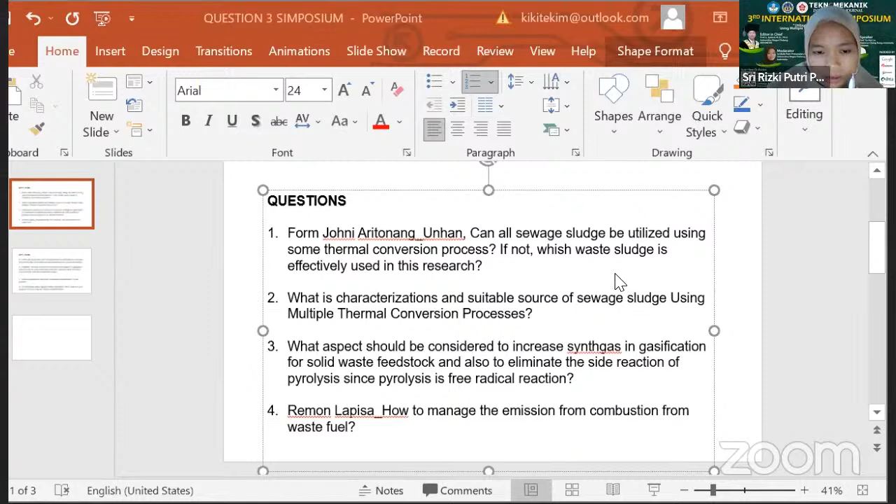Okay, Professor, so before we move to the fourth question, Mr. Johni Aritonang, is that quite clear for you, the answer from the professor? Mr. Aritonang, is it clear enough, the answer? Okay, I think the answer from the professor is quite clear.

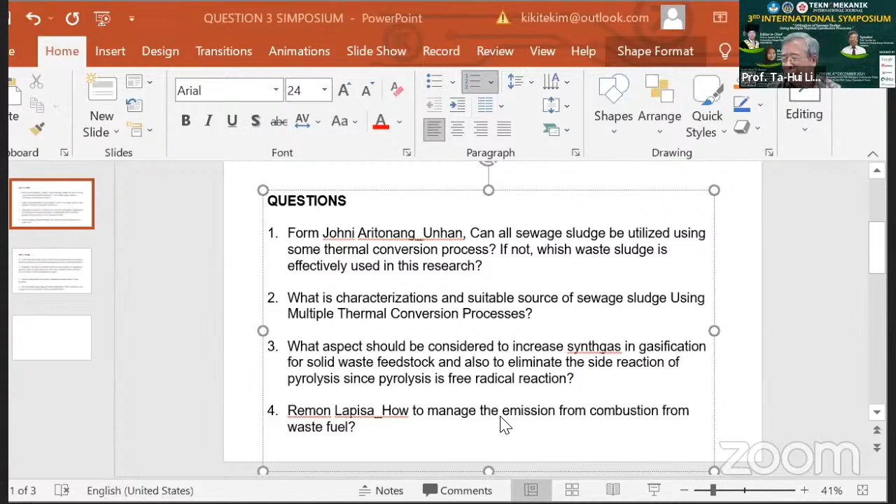So, Professor, question from Mr. Remon Lapisa, one of our research center staff: how to manage the emission from the combustion of the waste fuel? Okay, this is a good question and difficult to manage, because the waste fuel means the fuel coming from the waste, right? As I mentioned, the composition of your raw material is very important. If it already contains a certain hazard species, there are two ways to eliminate it.

The first one, if you go through the gasification, then you can have a filtering. For example, people understand, for the coal gasification process, you will produce SOx or a certain amount of NOx, and they always have an upstream pre-treatment. When you have syngas, those kinds of gasified gas, then they will have some denox or desox at first, then they clean it, then you just have the carbon monoxide and the hydrogen or methane left for the syngas used for your application.

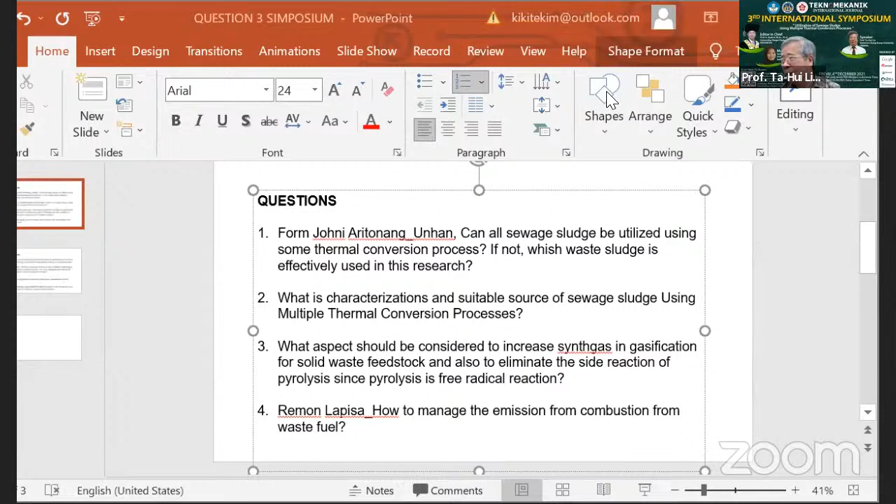If you base it on the energy consideration, you will try to get the industrial waste. For example, you may have some residue oil from the petroleum company, they will have a high thermal content to be converted. And for industry, actually, because those industries have different kinds of individual purposes, they are separate and easier to consider for a given waste.

For city waste, the composition is usually quite complicated and the heating value is low, so the value for producing biogas or pyrolysis oil is less. It is better to concentrate more on industrial waste, which is easier and more effective, giving more value, because it has a certain and more permanent composition, different from domestic wastewater which changes every day.

Thank you very much, Professor. So we can move to another question. Fifth question: is there any pre-treatment or treatment prior to gasification to decrease heat and energy consumption in the gasification process, except dewatering?

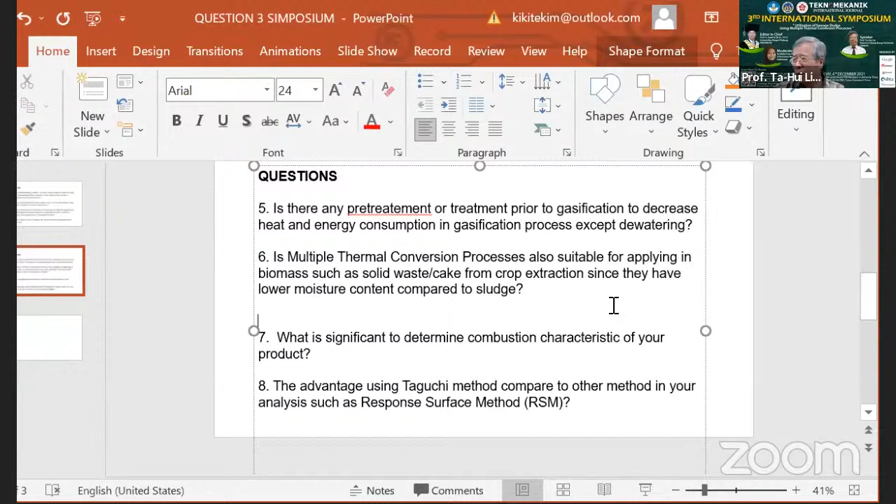Sure, this is a good question, such as palm oil cake from crop extraction. In my presentation I just gave the example focused more on sludge, and sludge has its own natural properties, but for different kinds of waste, more energy may be released - that's another case. I just gave a sample case for gasification and pyrolysis process focused on sewage sludge, which has a large water component. If you look at coke or sugar cane, those kinds of material, you can have even better output.

Thank you very much, Professor. No problem. Next question, Professor: what is significant to determine the combustion characteristic of your product?

In my presentation, for the pyrolysis oil, we try to look at the burning intensity since we look at liquid fuel, and we compare it to commercial heavy fuel oil since people usually use this, and that heavy fuel comes from petroleum industries. For our case, we go through pyrolysis on bio waste, then compare the combustion intensity, and in our experiment you can figure out and justify those combustion characteristics based on droplet burning.

If you want further judgment, you can apply it into engines, but sometimes people feel pyrolysis oil will damage the gasoline or diesel engine, depending on the composition of your biofuel. This is a major concern - sometimes it produces corrosion problems, or contamination that blocks injectors and causes engine failure. You need to consider the real application.

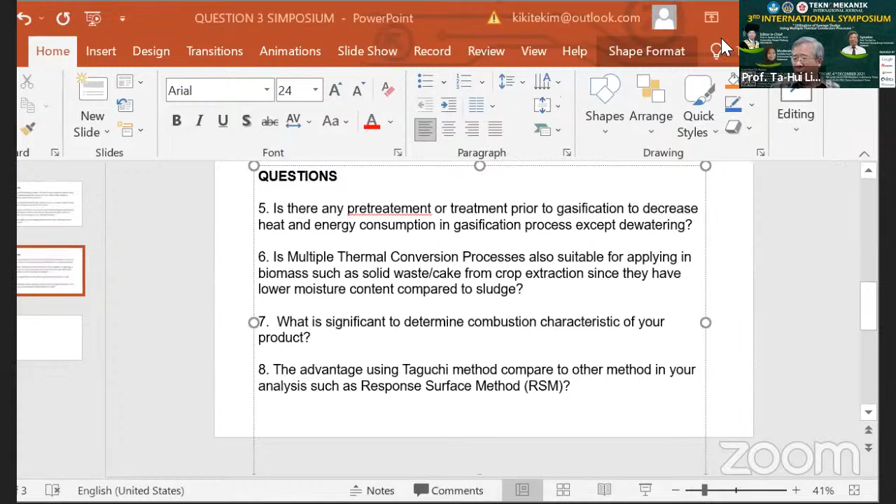I'm sorry, I do not have experience using those response methods, so I cannot give you the answer, but maybe that's a good thing to think about. Can we use the method? Up to now, the Taguchi method is very good for us because the results are quite excellent, but anyway we will think about that method. Thank you for your suggestion. Thank you very much, Professor.